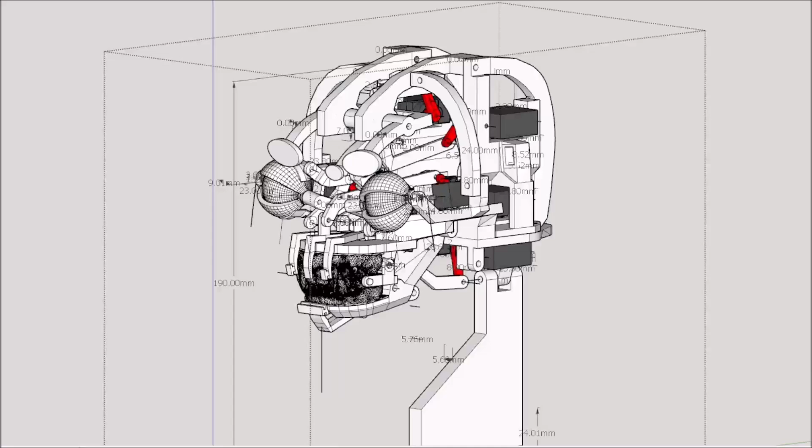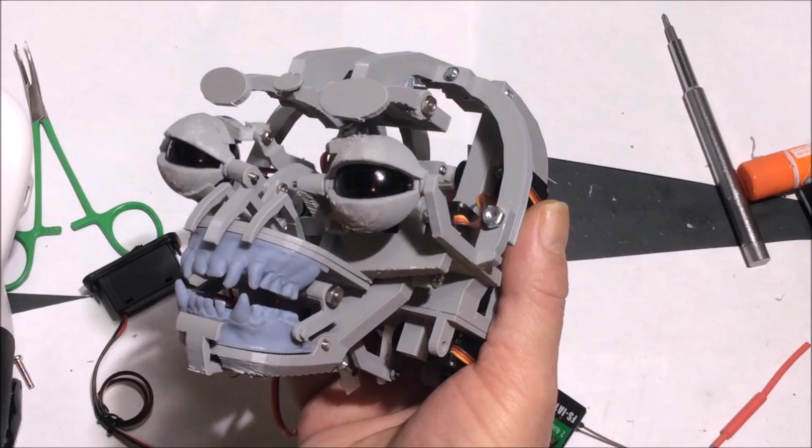Well, this is what I've been working on. As you see, this is like an 8 servo animatronic. It has, you know, movement. You see it here. This is the size. Well, what I'm working on is what printer would print the skin for this animatronic.

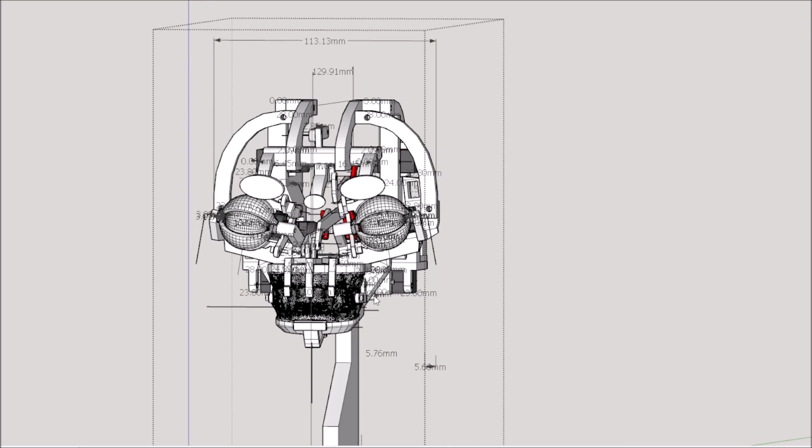The first thing, I'm going to redesign it, but I'm going to be adding wing servos to it. The servos that are in this now are 12 millimeters, I guess the wideness, the thickness of them, and the wing servos are 6 to 7 millimeters thickness because they go inside of an RC airplane's wing.

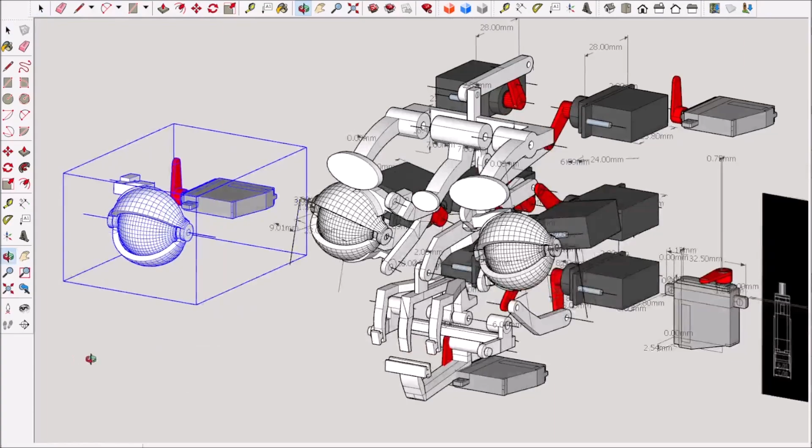So I'm going to replace these micro servos here and replace them with wing servos. So I'm going to redesign this whole mech. I want to redesign the lower lip to where it has its own servo directly with linkage instead of a cable or a guitar string.

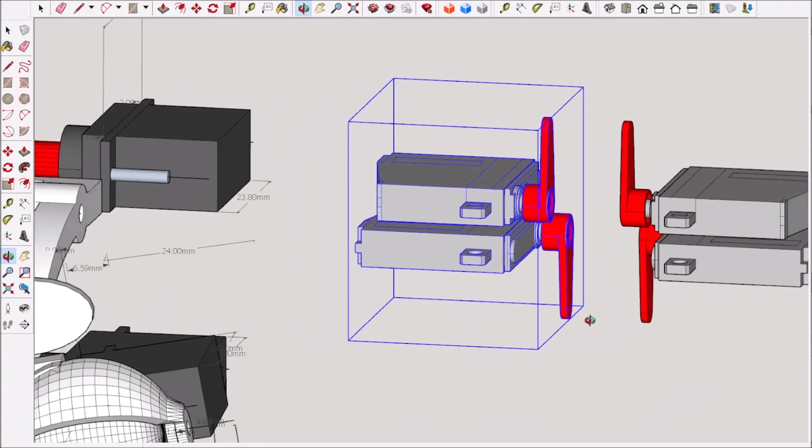But as you see here, I can make a servo bank by laying them out this way and having the linkage come up to the servo arms. After reducing the size, then I can make a skull and then the skin.

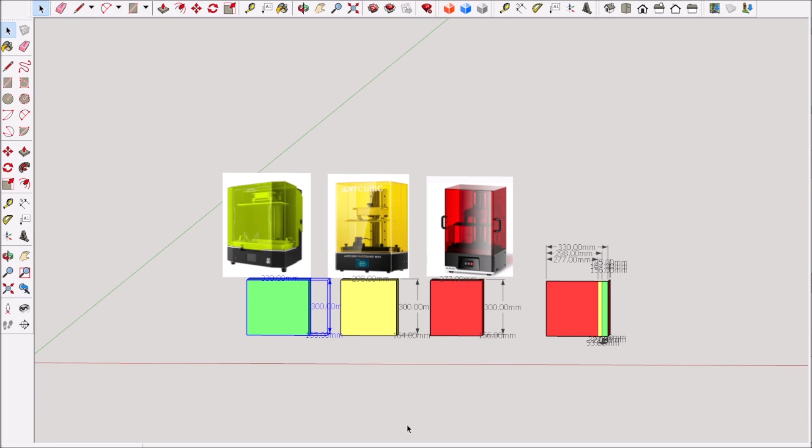I've been researching 3 printers today. The Phrozen Sonic Mega 8K and the Anycubic and the Elegoo also. Now, the Phrozen is the largest and Anycubic comes second, and last is the Elegoo, which they're not much difference, but maybe a few millimeters, anywhere from 20 millimeters bigger than, like I said, the smallest, the Elegoo. I took each one of their build platforms and designed it.

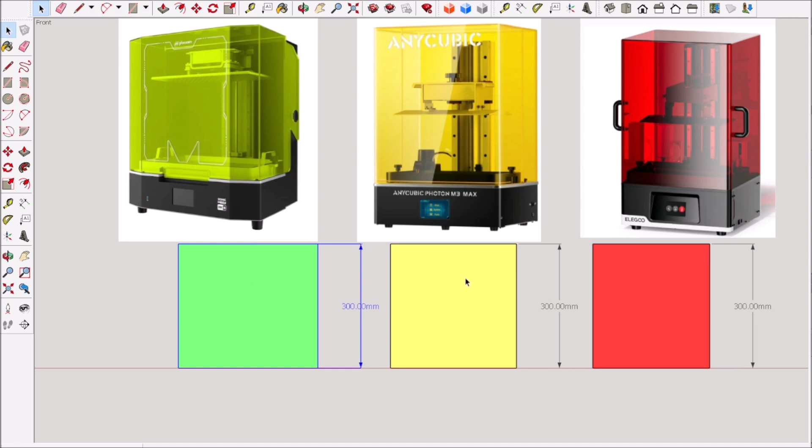That way I could put this animatronic, what I have now, even though it doesn't have a skull on it yet, or skin, that way I can get some kind of knowledge of knowing which printer to get. I know there's a few other larger printers out there. Most of those are like Kickstarter or something like that, you just don't know when they're going to become available.

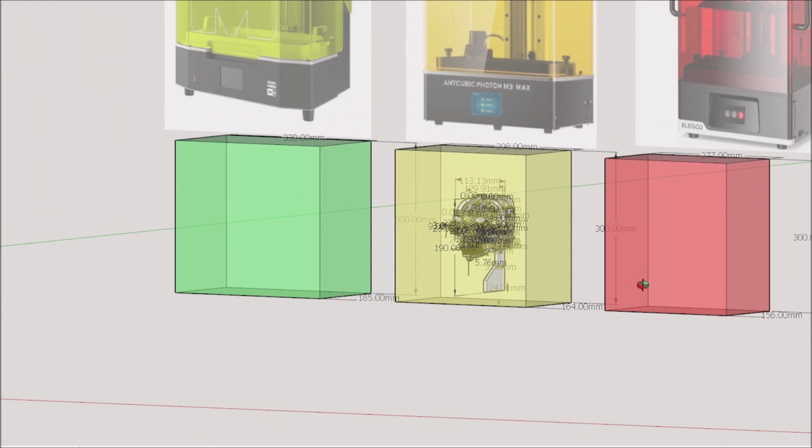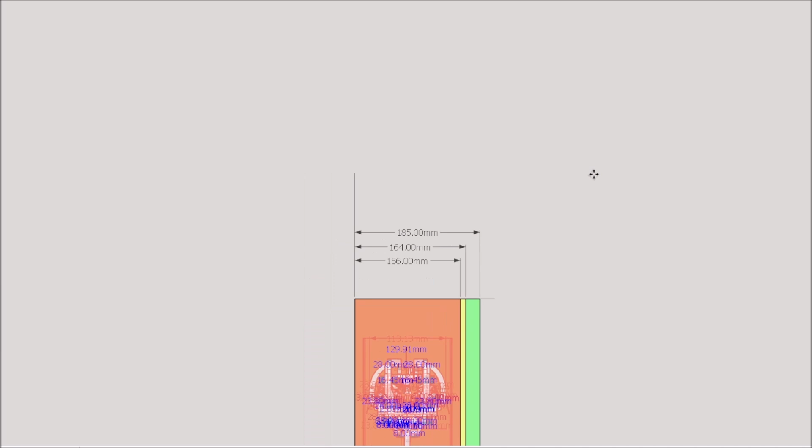But as you see here, I placed this animatronic inside the center build platform of Anycubic, and this did an X-ray. I know it's going to be printed upside down. I'm just placing it in there just to get a rough estimate. I'm pretty sure some of y'all may have these printers already, but I'm just, once again, doing research, and I know all of them have their pros and cons, but it's just something that I have to do.

The Phrozen and the Anycubic are available now. There's a pre-order on the Elegoo.

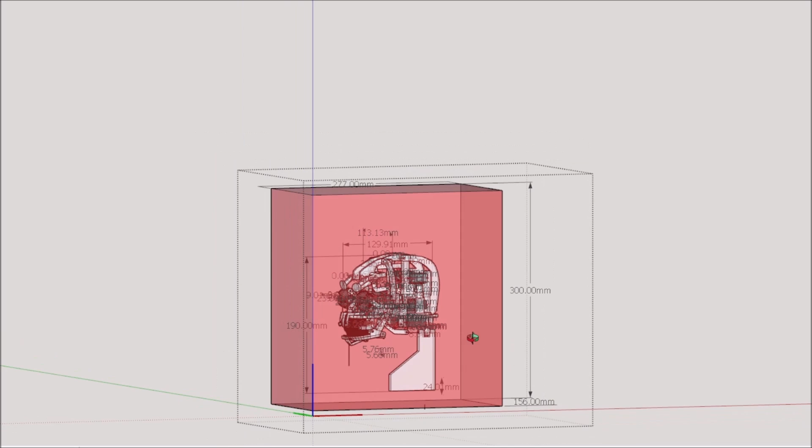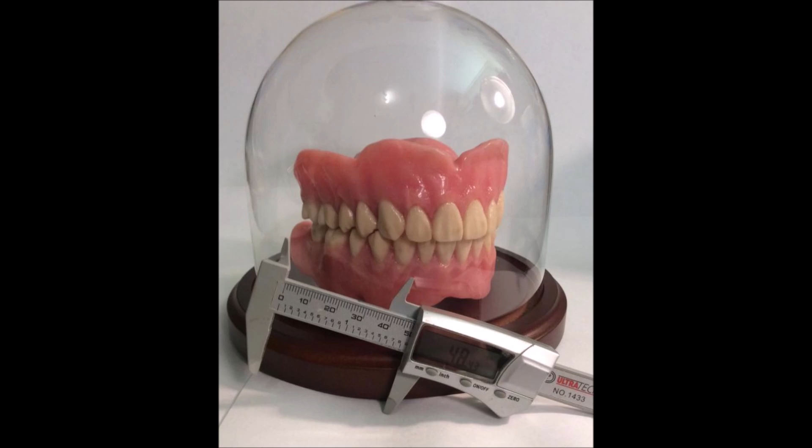I had somebody the other day ask me a question, how did I get into this? Well, here's me. This is like 1980 or 79. This is me trying to sculpt. I was a big movie buff, loved special makeup effects, admired Rick Baker, Dick Smith, Rob Bottin, Phil Tippett. I could name thousands of them, but I started doing dental work because of my art,

and I was in it for 30 years. And I just still have a love for monsters, and started making latex masks, and I had this passion ever since I was watching Star Wars and things like that of making animatronics. And I did an instructional video on an old school process, shot 94 hours of video and made my animatronic project. But when I was doing it, I heard about the technology of 3D printing, and that's when 3D printing was using plaster instead of filament.

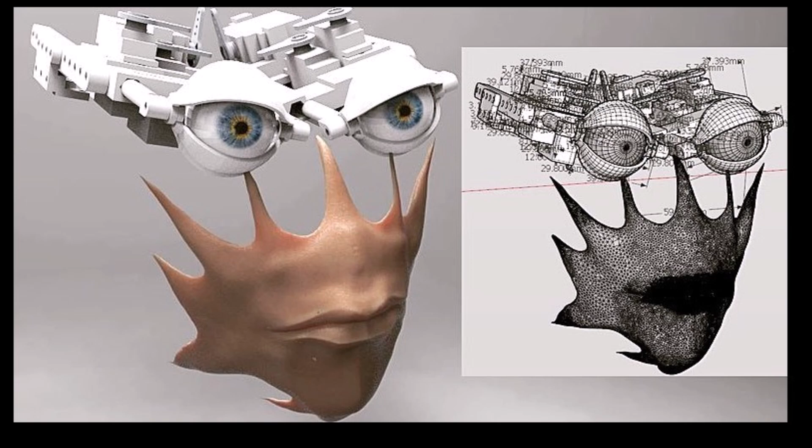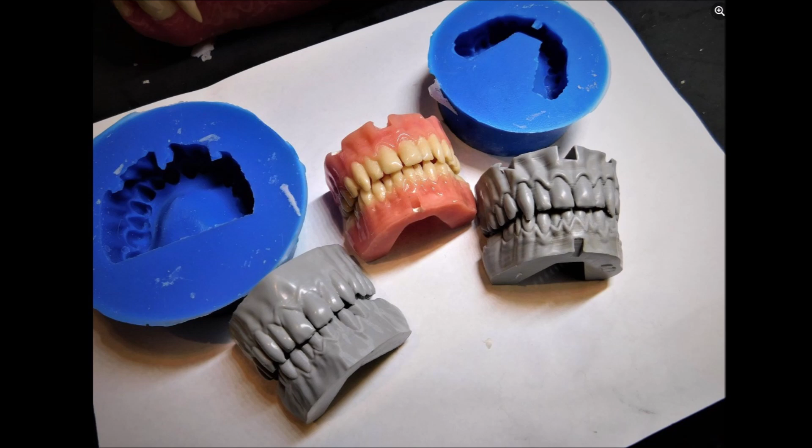So I started learning digital work and CAD and things like that. The old school animatronic way is the outside in, but I feel like I could do it inside out. Design all the moving mechanisms first, and then add the skin to it. That's what I've just been researching for a long time. But it's just a passion and a love for making creatures move.